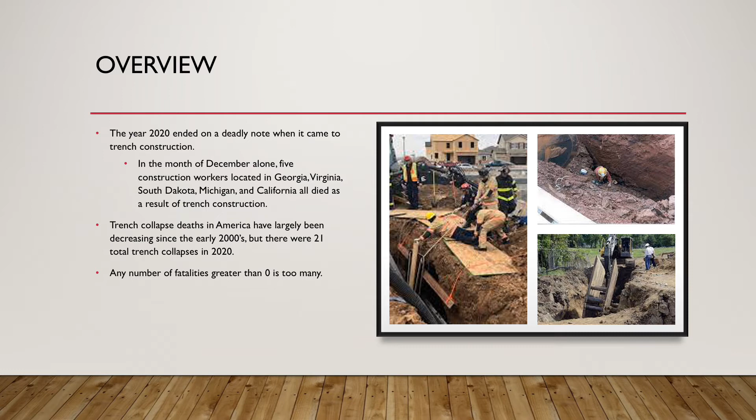This corner cutting has been an issue in our country for decades, as some contractors prefer to save a couple dollars here and there at the expense of the safety of all their workers.

According to OSHA's Trenching and Excavation Safety Handbook, excavation and trenching are among the most hazardous construction operations. OSHA defines an excavation as any man-made cut, cavity, trench, or depression in the earth's surface formed by earth removal. A trench is defined as a narrow excavation in relation to its length, made below the surface of the ground. In general, the depth of a trench is greater than its width, but the width of the trench is not greater than 15 feet.

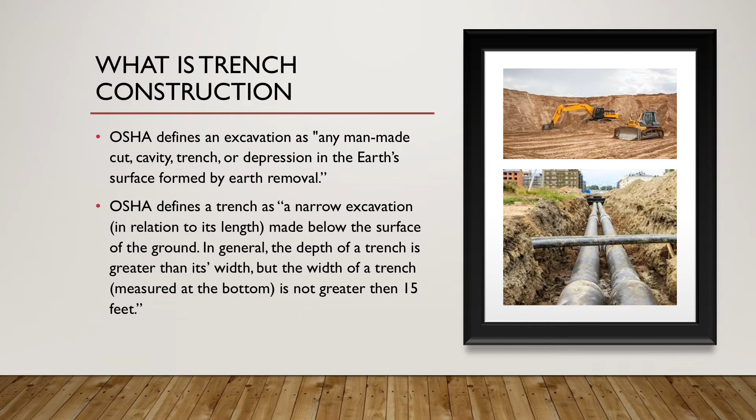Overall, trenches are vastly more dangerous than excavations because of their propensity to collapse on workers and the catastrophic effects these collapses can have on workers and equipment inside the trench.

Some of the hazards of trench construction include working with heavy machinery that can potentially fall on workers, manual handling of materials, working in proximity to traffic, contact with overhead and underground power lines, flooding or water accumulation, and the potential for excavated material to fall on workers inside the trench.

According to oshatrain.org, soil is an extremely heavy material and may weigh more than 100 pounds per cubic foot. A cubic yard of soil, which contains 27 cubic feet of material, may weigh more than 2,700 pounds. This is nearly equal to 1.5 tons, which is the equivalent weight of a car jammed into a space less than the size of an average office desk.

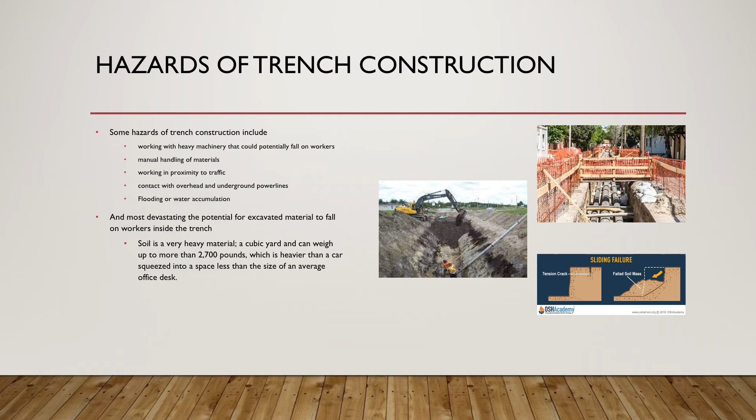Some of the current trench regulations include providing access and egress in excavations over 4 feet in depth, providing cave-in protection for trenches more than 5 feet in depth, which can include sloping and benching the sides of the excavation, supporting the sides of the excavation, and placing a shield between the side of the excavation and the work area. A competent safety professional must also be on site to inspect work and make sure everything is going smoothly.

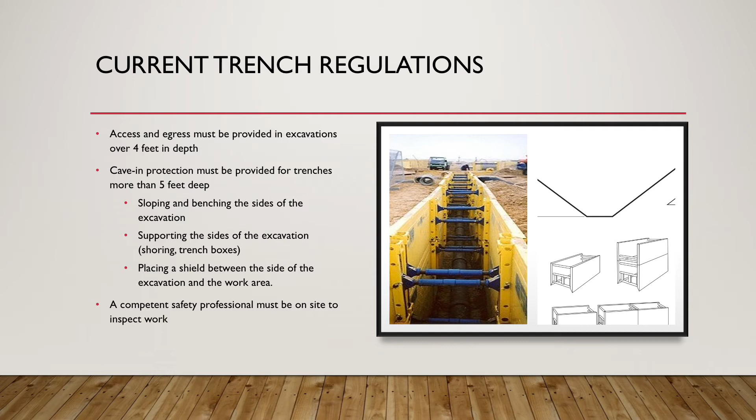OSHA has jurisdiction over 7 million work sites. When an inspector finds violations of OSHA standards or serious hazards on the job site, they may offer the contractor citations and fees. According to OSHA's website on penalties and fines, the maximum penalty amount for serious, other than serious, or posting requirements is $13,653 per violation. The maximum penalty amount for failure to abate is $13,653 per day beyond the abatement date, and the maximum penalty amount for willful or repeated offenses is $136,532 per violation.

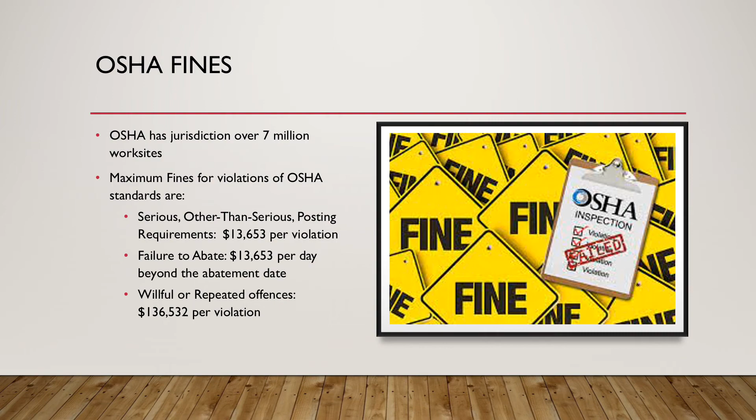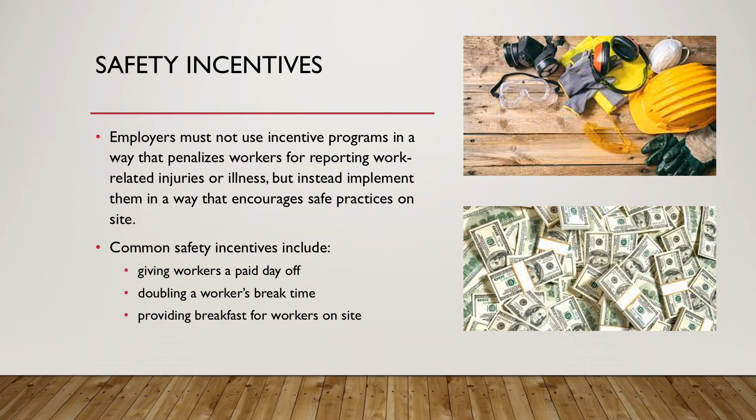According to OSHA, employers must not use incentive programs in a way that penalizes workers for reporting work-related injuries or illness, but instead implement them in a way that encourages safe practices on site. Some of these common safety incentives include giving workers a paid day off, doubling a worker's break time, or providing breakfast for workers on site.

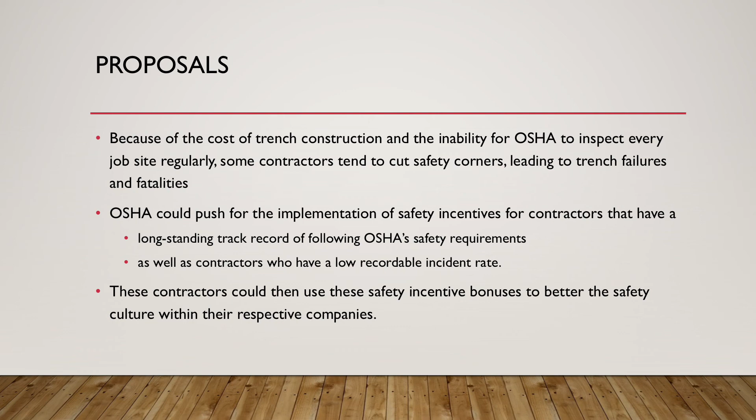Because of the cost of trench construction and the inability for OSHA to inspect every job site regularly, some contractors tend to cut safety corners, leading to trench failures and fatalities. To combat this, OSHA could push for the implementation of safety incentives for contractors that have a long-standing track record of following OSHA's safety requirements, as well as contractors who have a low recordable incident rate. These contractors could then use these safety incentive bonuses to better the safety culture within their respective companies.

The first question that arises is, how do we pay for these safety incentives? Currently, maximum fines for violations do not provide enough of a deterrent to willfully violating these regulations. Many contractors may believe it will not be as costly to take the risk and pay an occasional fine to OSHA rather than ensuring that all of their construction operations meet the requirements and standards set forth by OSHA.

Therefore, I believe that OSHA needs to increase the penalty for not shoring and protecting trenches so that contractors will be less willing to violate the regulations at the expense of their workers' safety. These funds could then be used to pay for the safety incentive program, and those funds dispersed out to contractors could then be used to enhance their individual safety programs within their companies.